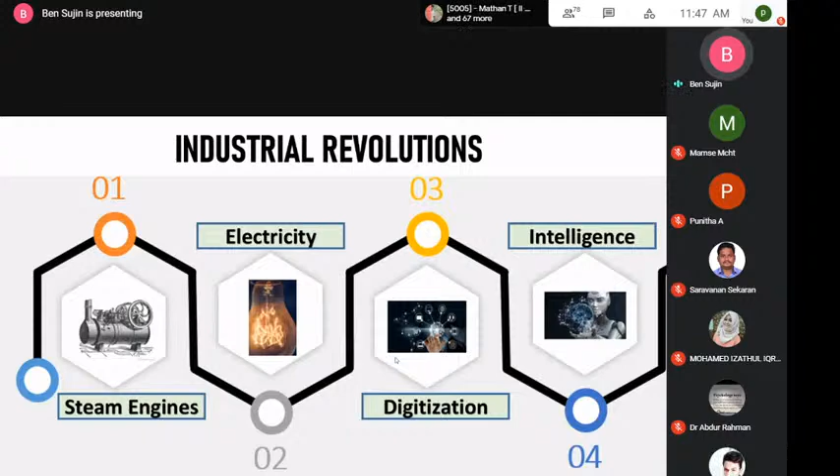Now you people are in the second or third year of your engineering courses. When you pass out, the industries and companies are going to look for people who are good in fourth industrial revolution techniques. So I would like to touch on a little bit about the different areas - I'll give you a brief of the areas where the fourth industrial revolution is going to happen. The first one is quantum computing.

Quantum computing - even though we heard about these things in past years, now in the fourth industrial revolution, the type of computing that's going to happen is high-speed data processing. Let me give you an example: when you're driving a car on the street, as a human, when I see someone crossing the road, immediately my mind tells me to apply the brake, so I can prevent the accident.

But nowadays you could hear there are autopilots, cars driven without drivers. In UAE it's there. In America, in USA, many countries are inventing this. The main major company doing that is Tesla. They are introducing cars without drivers.

Just imagine that thing. When the car is moving on the street without a driver and a pedestrian is crossing the road, what will happen? Immediately the car has to apply the brake. The time remaining will be a microsecond, a fraction of a second. So the sensor will be sensing whether someone is crossing - there will be cameras or sensors. It has to immediately take the data and process it. The processing speed should be high so it can immediately apply the brake. That's where quantum computing, the high-speed data processing, will happen.

Let's go now into the robotics. I'll give you some basics of robotics, and end my seminar with, if time permits, how you can do a robotics project a little bit. Now, the robotics functionality, basics of robotics.

What are the three things we have? There are three basic functionalities with any robot. If we understand what it is, it's same like our human being. When we go outside our house every day, we will immediately start sensing the environment. Sometimes it will be too hot, sometimes it will be raining.

Immediately our human body will sense the environment. Same way, when you are going to make a robot, the robot should sense the environment. How are we going to inbuild this? Using some sensors. We have different kinds of sensors available for each and everything, so that your robot will sense the environment. We can say this is the input for your robot. Like we can smell, see, and hear what is happening around us, so through that we are getting some inputs.

Now the second functionality in robot is thinking. Like when we sense the environment, say there is rain, immediately our brain will think and decide upon it, whether I have to go now, whether I have to take an umbrella, or whether I have to wait for some time. Same way here, we should have a mechanism to think based on the sensed input. Some program has to be there to think and decide upon it.

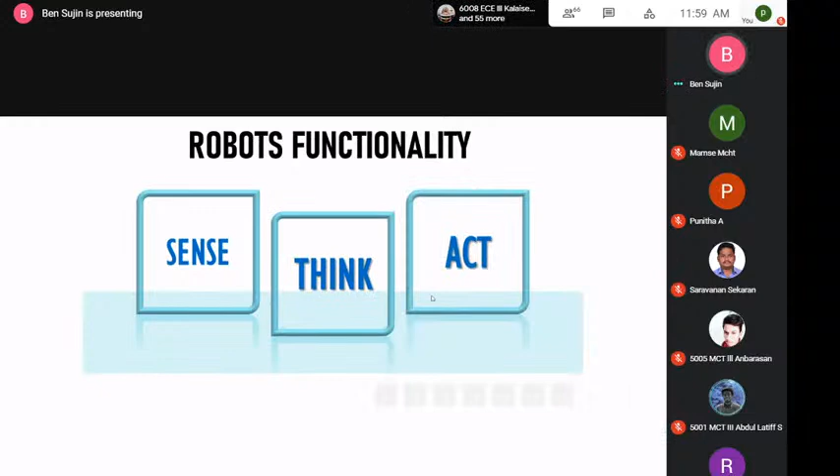I'll go a little deeper into this through the next slides. Then finally we have the output, you have to act upon it. Based on the input you should think, then you have to act and give an output. So these are the three basic functionalities we have in robots.

We can call these functionalities robot subsystems. More technically, we call the first one perception capabilities. To adapt to the environment, we have to sense what is happening around, and this sensing is done through sensors. As I told you, you may have some internal sensors and some external sensors. I can give you an example of external sensors.

For example, we have eyes, which we can say is an external sensor. When we move towards some obstacle in front of us, immediately what will we do? There is some obstacle hindering our way, so we will take another way and move. Same way, in robots you can have different kinds of sensors.

In project terms, you can have ultrasonic sensors, IR sensors. For industrial purposes, you have laser sensors, range finders, lidars, many sensors. These sensors which capture the external world we call external sensors. Internal sensors are the sensors inside the robot which control the robotic movements.

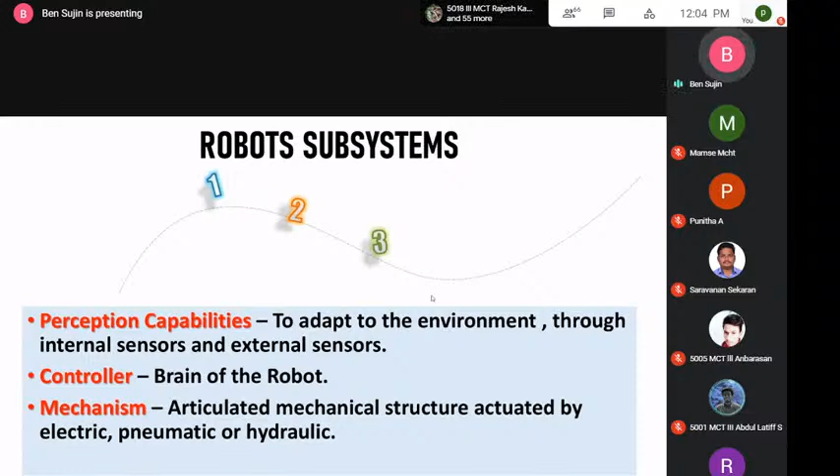I will show you a small video about actuators, because some of you may be new here about actuators. I'll show you an electric actuator, a small video for you.

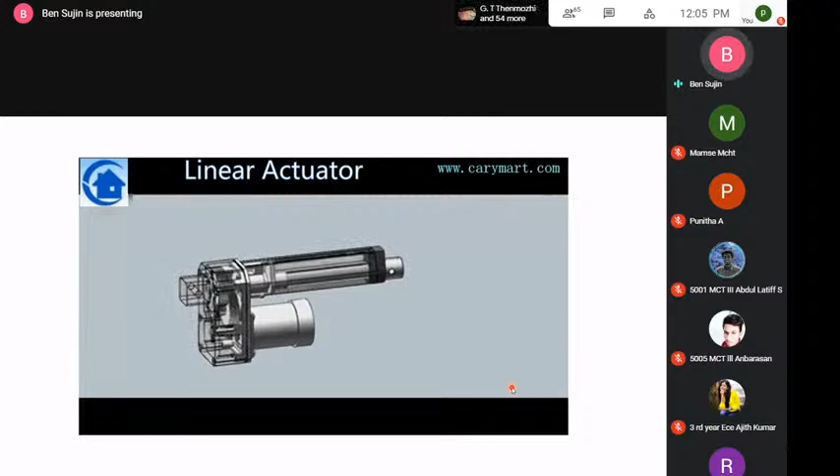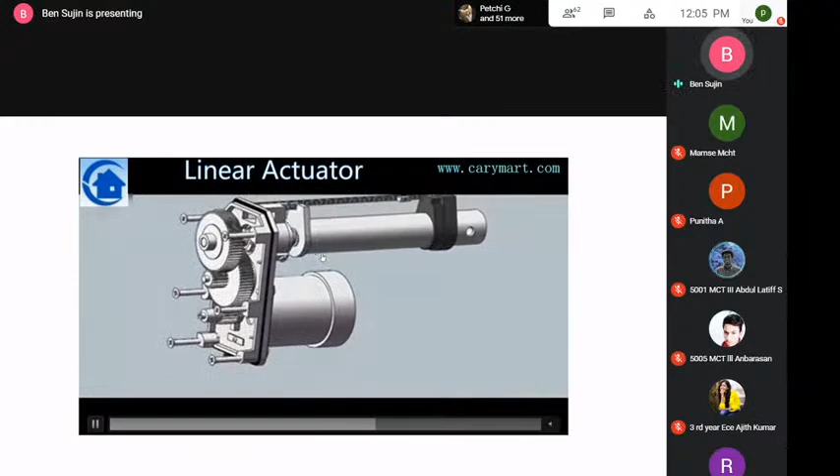So this is an electric actuator. We have an electric motor here, and this one is actually driven by gears, using the concept of nut and bolt. We know that in our places we use too many nuts and bolts. When the nut rotates in the clockwise direction, the bolt rotates in the anti-clockwise direction. So the same concept is used in electrical actuators.

Let's move to the levels of autonomy. When you are going to develop a robotics project, you should be able to know what level of autonomy, how much automation you are introducing. Level 0 is no automation, nothing is autonomous there. Level 1 automation means only one function is automated. In the present industries, many machines are at level 1 autonomy, with only one function automated.

In level 2, you will have inputs from the sensors, as I already told you. From here, it is going to make a big impact on the fourth industrial revolution. The machines will get inputs from the sensors, and based on that, it will take the decisions. That we call level 2 autonomy.

Level 3 autonomy is automated, but some human intervention will be there, human inputs will be there. Level 4 and 5 is fully automated, working like a human being, without any intervention. It will take a decision by itself.

For example, if it is going to get a new change that you didn't program inside, this is what is happening with artificial intelligence. It's like: if this is there, do this one; if this is there, do that one. If that program is not there, but the computer or machine is getting different inputs, it doesn't match with your program.

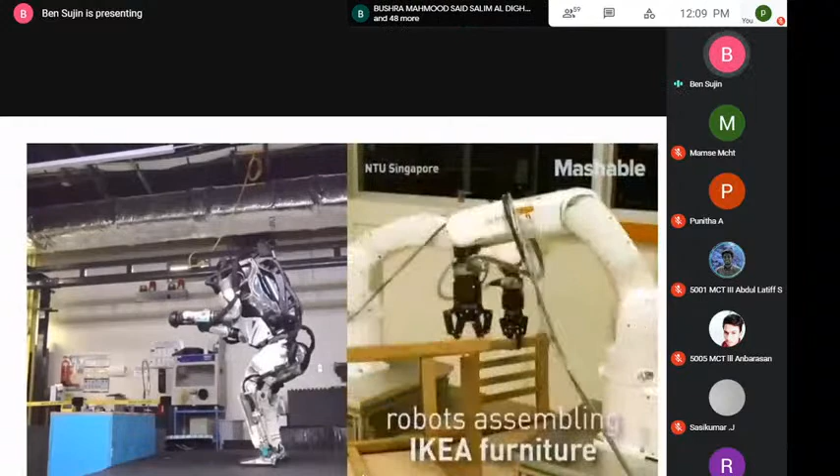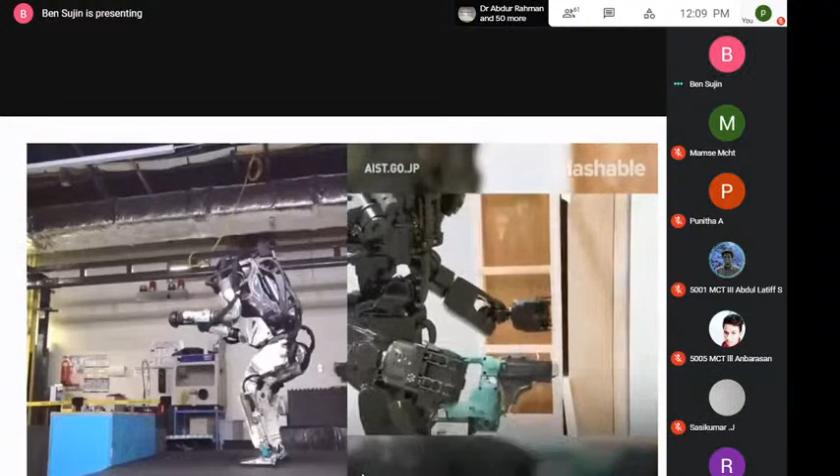So in the first video, you see the robot jumping and standing by itself. In the video it may feel very easy and nice, but in real time it's not like that. To make something stand like a human, it takes more time, more calculations, more kinematics analysis, and more physics applications you should be able to understand. But I'm not telling you it is difficult — it is possible for us, we can do it.

Actually I realized this when I was developing a project here with the help of my students. We could understand the reality behind it. When we wanted to make the robot stand, it was not standing. Then we were able to apply some kinematics analysis, and based on that we developed one project here. If there is time at the end, we will see that one also.

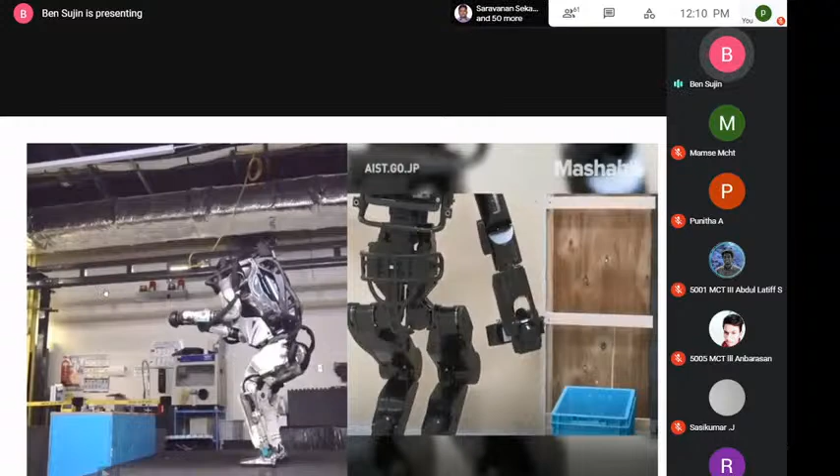Now, I will just give you some overview about the classifications of robots.

Many robots and robotics technologies are there, with some classifications so that you can decide what type of robot you are going to make. The first classification we call UMV, Unmanned Marine Vehicle. It is about any robot you are going to use in the marine environment, in the sea.

This is further classified into two categories: underwater vehicle and surface vehicle. If you make a robot that works on the surface of the sea, on the level of the water, above the water, we call it a surface vehicle. If your robot goes inside the sea to do research there, like snake robots, we call it an underwater vehicle.

So, too much research, why do we want to make robots here? Many people actually have a negative thought about robotics - that if the robot comes, it will damage mankind, many things. But I'm going to speak about the positive side of it.

There are many challenges we have. We all know that around 1999 or 2000, I saw news about a person doing research underwater who was killed by a poisonous fish. So we are actually risking our life - people are risking their life to go into the sea, to the deep sea, to do research there.

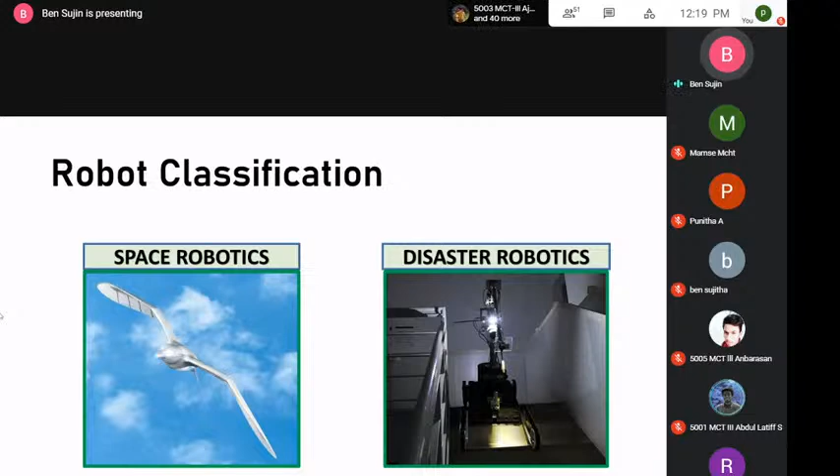You see, when a natural disaster comes, we can use robotics there. In a building, if there is a fire, if a human is going, automatically he will be killed by the fire. So instead of that, if you have a robot with fire resistant materials, the robot can save the people who are getting affected by the fire. When a natural disaster like a tsunami or whatever is going to come, if you can able to make a robot to prevent people from the natural disaster, we call it disaster robotics, which you can do more things for the society.

Then the third one is drone robotics. I already told you about it, the UAV, aerial vehicle, which can able to fly over the sky.

Okay, then on the right side again, exoskeleton robotics. There are many people living without a hand, living without legs. They cannot able to move, and also there are people in bed, completely bedridden, they cannot able to walk or anything. So for them, if we could able to make or apply our robotics technology, for example, a person not having a leg, if we can able to give a robotics technology for that person, it will be a great help for them.

It's a great help for humanity. Immediately you will say, okay, there is an artificial leg, why don't he use that one? I will give an answer there.

When we walk outside and see a big hole or a fire on the ground, we just take another direction and move. Or without knowing, if you put your leg onto the fire, a sense is given to your brain, and you move your leg away. But if it is an artificial leg and you put it onto the fire, there will be no sensation at all. So immediately that artificial leg can kill that particular person too.

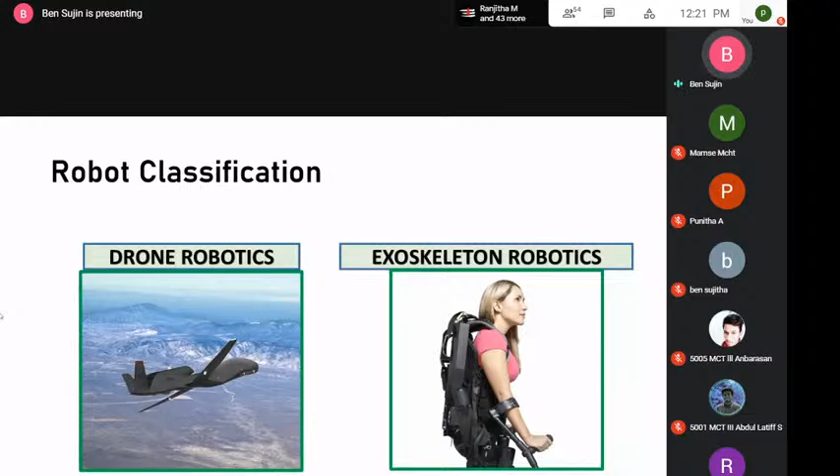So next one is humanoid robots. I already touched on that one. So I'll go to medical robotics.

In the medical field, as I told you before, there is a big challenge in front of us. We can do a lot of things. Nowadays when we go to the hospital, we see the nurses coming and taking blood from us for testing. Now hospitals are being converted with robotics technology. You just go there, keep your hand there, the machine will come and take the blood from your vein, and give it for testing. Automatically you will get the result. Don't be afraid of it, the machine will do it accurately.

One of my students did a project, a medical assistant, a smart nursing assistant, which will help bedridden people and the old people who are in bed for a long time and cannot move. Even if they don't have someone to care for them, there will be a robot. They made the robot able to interact with people. The people can touch it, it can clean the people, and it will give the medicines at the right time. So this is a robot which can work in the medical field. You have a big challenge in medical robotics also.

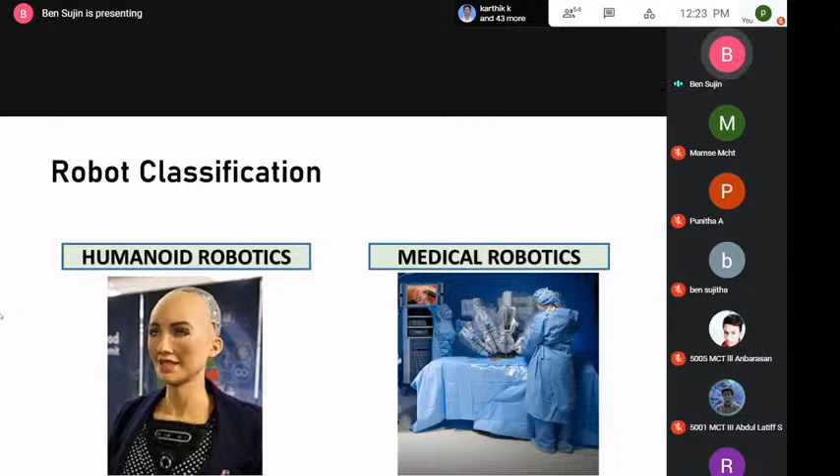Then on the left side we have industrial robotics. There are industrial robot arms already in the industries, but now in the fourth industrial revolution we are going to put intelligence into it. Then on the right side we can see underwater robotics, like the snake robot I told you about before, which will go inside the water.

What I am going to do is give you a small idea, just to inspire you. You know that years back, maybe 15 to 20 years ago, in India, we lost internet connectivity for days. At that time, because we didn't use much internet, we didn't feel it was a big thing, but it made a big impact.

Why was it cut? Actually, there are submarine cables which connect between the countries, going under the water, under the sea. One internet cable was cut by a ship that passed by it, and because of that the internet connectivity was cut. Also, some big fish, if a shark is there, can damage the underwater cables.

Also, some hackers or intruders can go and tap the data and modify it. So now if you can make an underwater robot to scan this, to test this, to understand what is happening with the internet cables, the submarine cables, this will make a big change in your life.

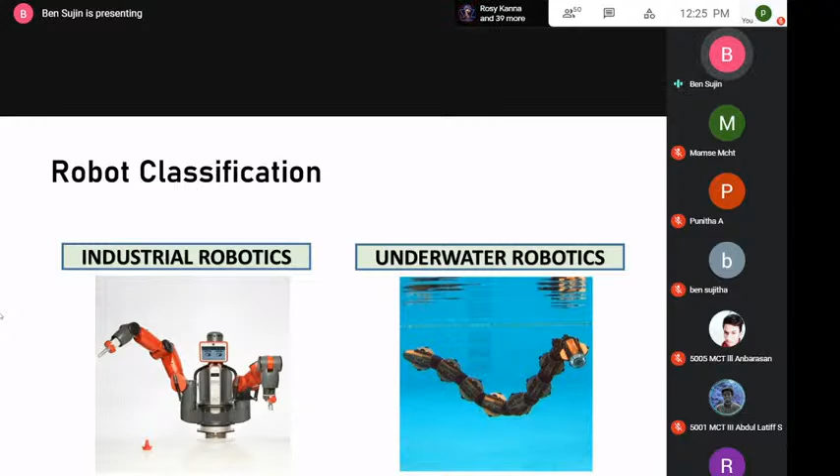Okay, now just a quick touch and I'll go very fast about the intelligence in the unmanned guided vehicle.

Actually, when robots move, we say that path or environment can be of two different types. One is static environment - for example, in my home, my table, bed, and other things are kept there. If it's fixed, I say it's a static environment, so it's not going to change. So I can make a robot which can move here and there by setting the path.

Some path will be dynamic environment. When you make a car that moves on the road, the environment is completely dynamic. So when it's a dynamic environment, how can we make the path, or how can we draw the path for the robot? So these two different things are there.

Some algorithms we can use for static environment - if you're computer engineering students, you might have heard of the first algorithm called Dijkstra's shortest path algorithm. For dynamic environment, you can use A-star algorithm. Many different algorithms are used. I'm not going into the depth of that now, as time is flying. I'll just show you a small video of a Chinese logistic environment so you'll understand something better.

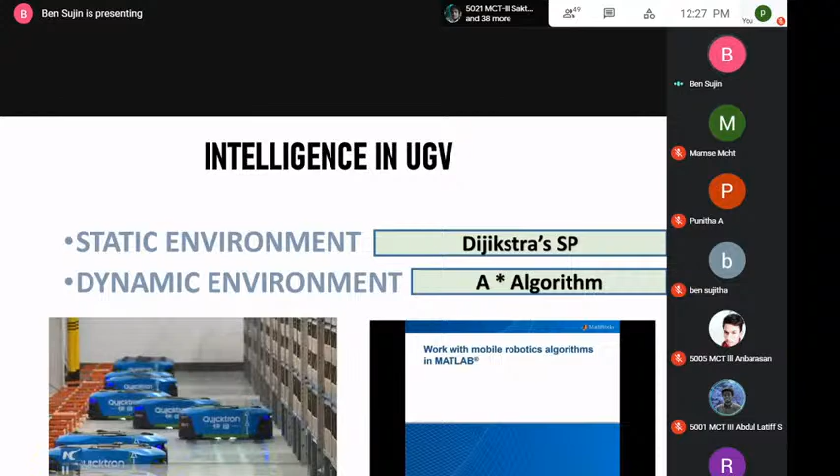Okay, just a logistic environment, how it's changing the world.

I'll just give you some idea about robotics project development from the student's point of view. If it's from the industrial point of view, it will be a little different, but the same idea, same concepts apply.

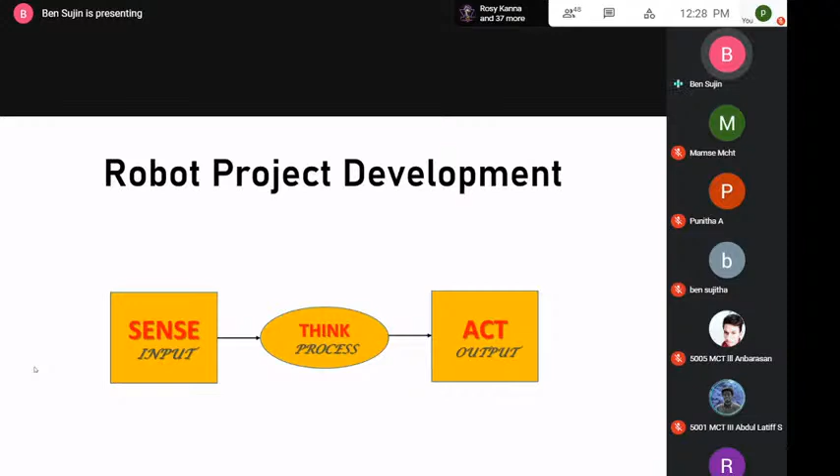As I told you in the beginning, we should have three functionalities. First, we should know there's an input, then a process, and there should be an output - like sense, think, act. So in the thinking process, I would like to show you with a live demonstration some sensor controllers I have. I will just open my camera.

So the first one I have here is the Arduino controller, a microcontroller. This is actually a very normal thing - many people, many students are already using it. But if anybody isn't aware, I'll show you. You can see here on my camera, the controller, the Arduino - it looks like this board. This is a simple microcontroller you can use.

Apart from that, on the right side we have the Raspberry Pi. It works like a computer, actually a simple computer. You can see it here in the video - this is a Raspberry Pi board. It's actually based on open source, like a Linux operating system. The operating system inside it here is called Raspberry Pi OS.

Now it's called the Raspberry Pi operating system. You'll see a small memory card over here, into which we put the operating system, and then we can work. You can see here we can connect your mouse, keyboard, and many USB devices. This is a screen which lets us see what's happening inside it. You can connect a camera here as an input device, and other input devices like sensors to these pins, and output devices like motors to these pins. We call these pins GPIO pins. Okay, this is one small microcontroller.

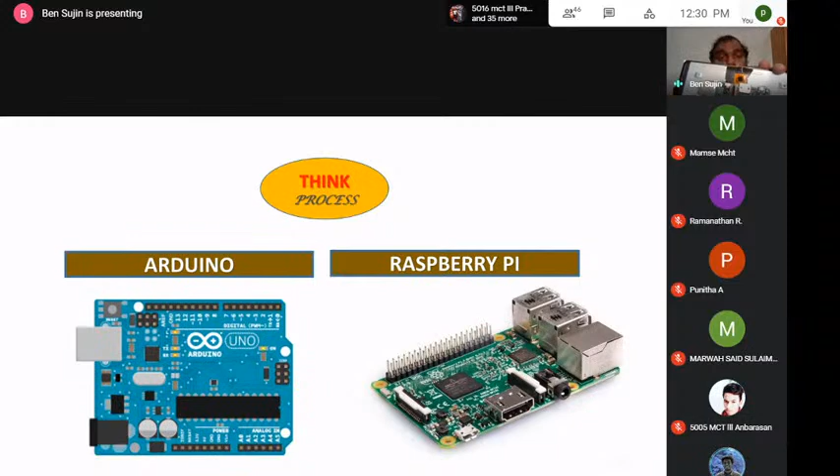Apart from this, if you're going to use robotics for industrial purposes, you can use another thing which I am also using - PLC, programmable logic control. That microcontroller is very accurate; you get outputs at high speed. So the first one is Raspberry Pi, and I told you about PLC, programmable logic control, which I am using.

Then for competitions, if you're going for a competition, you can use this controller, the VEX controller. It comes with different kits, like hydraulics kits and everything, automated - it comes with that. If you're going for a robotics competition, you can use this VEX controller.

I would like to tell you, one of my project student groups participated last year and won 4th position in the IEEE robotics competition. They used this controller there. Then there's RTOS supported controller - some other real-time OS supported controllers are also available. Based on your application, you can choose the appropriate controller.

Okay, and some sensors. The first one, some simple ones. I'm just focusing on simple project development only, not a huge development.

The first one you can see here is the ultrasonic sensor, which we use in the normal world. Okay, I don't have it here.

The second one is the IR sensor. It looks like this one.

Then below you have the color sensor. Sometimes we can use the color sensor when you want to make a robot arrange cubes based on colors. So you can use the color sensor.

This one is the motion sensor. When some people pass by, if you want to understand it, you can use this motion sensor.

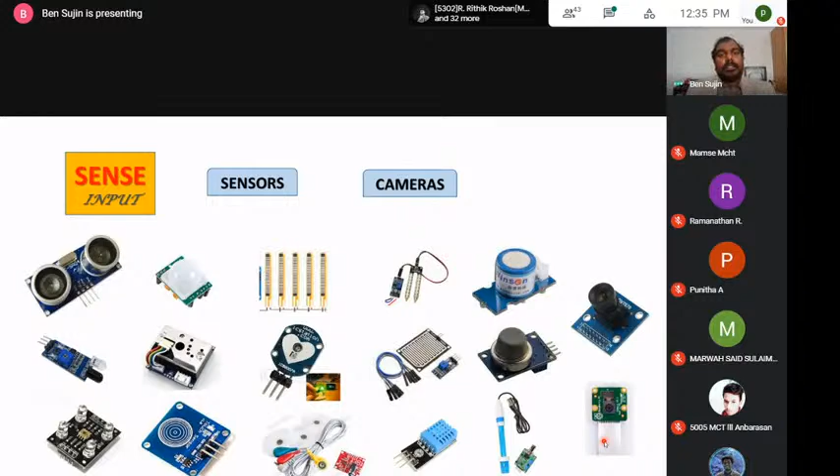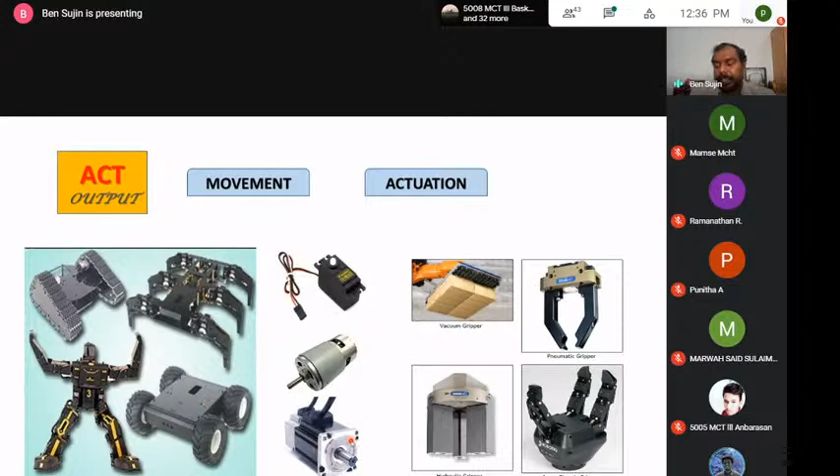So these are the output devices. Okay, so then I've just touched on my different research, what I'm currently doing, and I will end my session here.

The first one is the smart nursing assistant. You can see it over here on the screen, which is done by my group of students.

The second one is the PV panel cleaning robot, shown here. Nowadays many places use solar panels, and when we put solar panels into the deserts, too much dust forms onto them, so people have to go and clean every day. Instead of that, this robot will work and clean the solar panel by itself.

As I told you before, there is a dust sensor, you can see it over here. The dust sensor will sense the dust and go to the exact place where it is formed, and clean it.

Then another one is the cabling robot for telecommunication. You can set the GPS position and draw the map on the robot. It will go along the path, take a hole on the ground, and lay the cable there.

The next one is the smart helmet, actually for blind people. Just like a helmet, you put it on your head. It will sense the environment, read it, and tell your ears - in front of you there is a door, in front of you there are steps, in front of you your friend is with you, and so on.

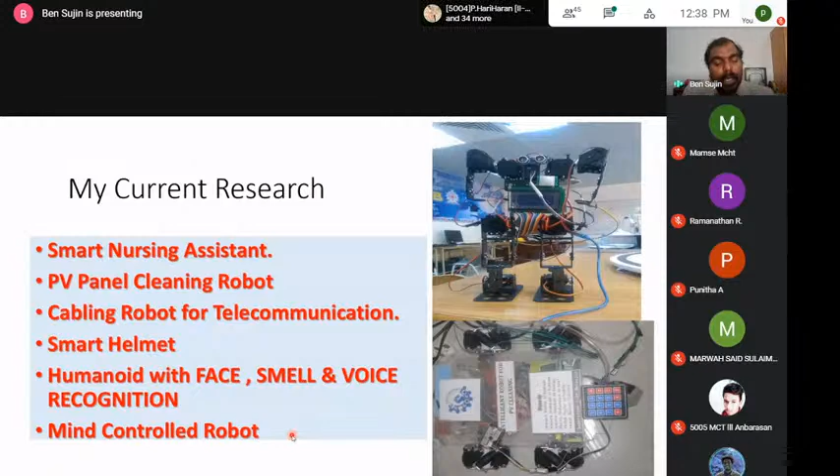Then the last one, as I told you, is the mind controlled robot, which is the research I'm currently doing. Hopefully if we meet again, I will show you how the mind controlled robot works. Thank you all, thanks for your patience and listening. If you have any questions or queries, please let me know.

Actually, in the chat box, an old student has asked to tell about the NVIDIA Jetson Nano controller.

Hello, yes ma'am. So, yes, in the chat box an old student has asked about the NVIDIA Jetson nanocontroller - the nano microcontroller, ma'am. Yes sir, in chat box he has put up the question sir. Okay, okay, I will say, yes ma'am.

Okay ma'am, actually this is a new microcontroller given by a company called NVIDIA. So far I haven't worked with it, but they have told that it has some artificial intelligent techniques and technologies built into it. We can control and even sense the environment using video images, get inputs as video images, and take decisions upon it. So far I haven't used it, so I cannot give you a clear cut idea about it, but I just came across it.